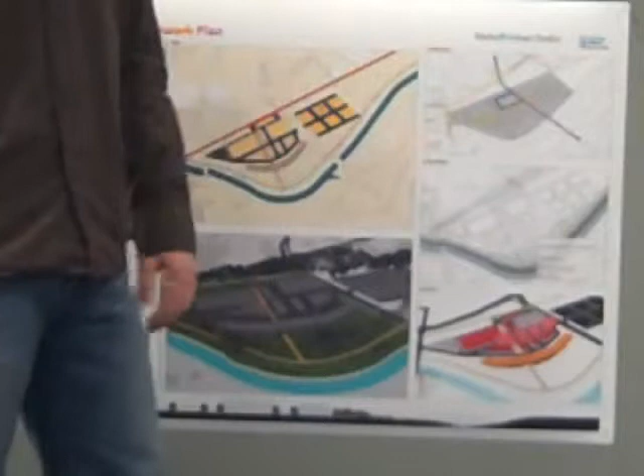We really wanted to emphasize the major connections with the rail line, connections to St. Bernard and Northside on Spring Grove, as well as the close proximity to I-75. We felt that all those transit connections would help bring a good amount of people into the area.

The land use, like we said, is first floor retail and commercial. Second and third floors would be office, and then this area would be the residential units.

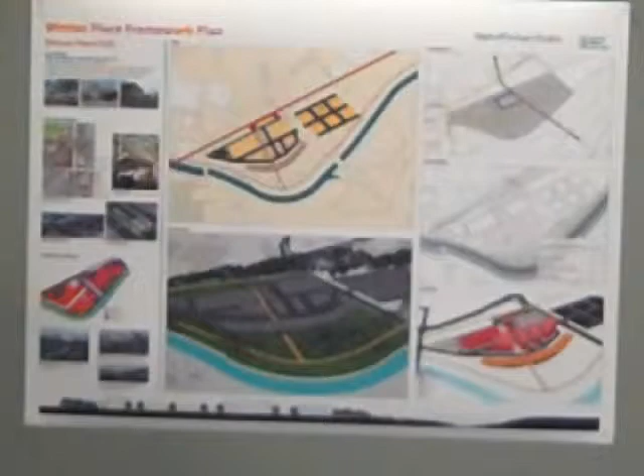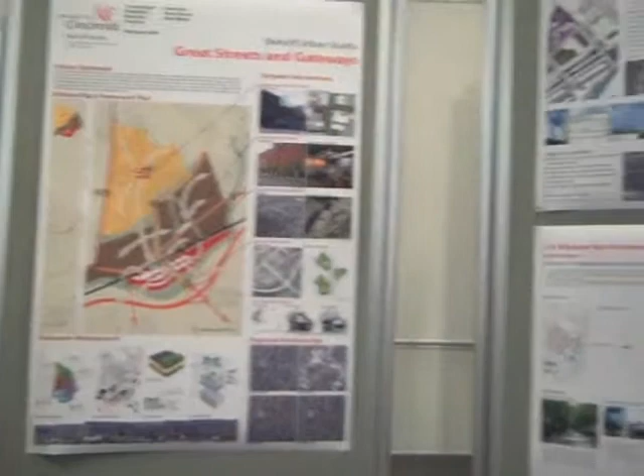When we were talking about creating a green industrial park in this area, we realized that to a certain extent we need an anchoring institution to both give identity to the area and give it a sense of community and cohesiveness, because at present it's a bunch of businesses operating independently of each other. In order for this to really function as a green industrial park, to stimulate the synergies that might happen there, it needs a face. So the project I was proposing was an industrial business incubator on one of the sites in the neighborhood.

This is a large storage facility that's already there, so this would be an adaptive reuse project. You can see in the concept diagram that this building, since it sticks out of everything, becomes the face for the entire area, as well as serving an incubator function which will help young green industries come into the area, get started up safely, and then benefit the industrial district through their business.

From an urban design standpoint, the incubator becomes the focal center for this entire belt of industry, which is shown here in the framework plan. The streets are reoriented—these are actually existing streets that are extended all the way through to the Mill Creek. Then the streetscaping is redone to emphasize the runoff mitigation strategies we've been talking about.

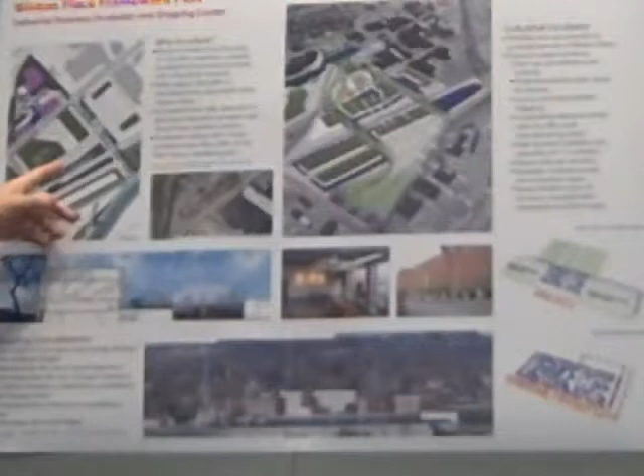Using curbless paving, filling in non-spaces with constructed wetlands, and advocating use of vegetative roofs wherever possible. The hope is that this would give the entire industrial community something to circulate around. It doubles in function as not only an incubator but a shipping distribution center, so young businesses can bring in their products, consolidate shipments, and then ship them out.

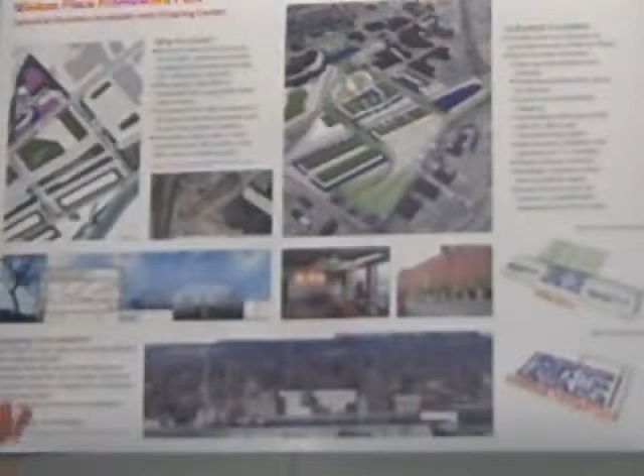So programmatically and formally, it's designed to act as the center of the industrial community, so that this Winton Place area can have some identity.

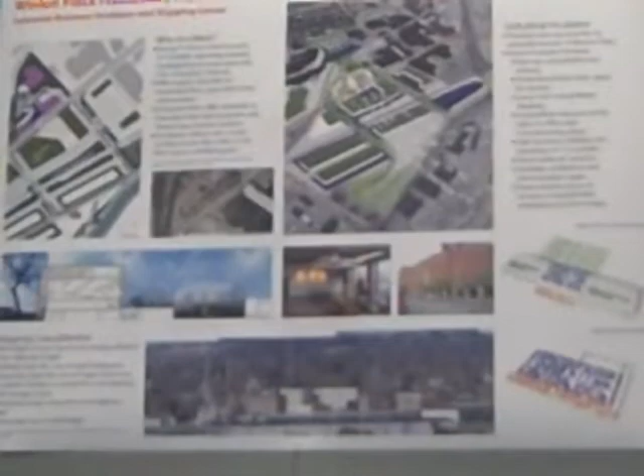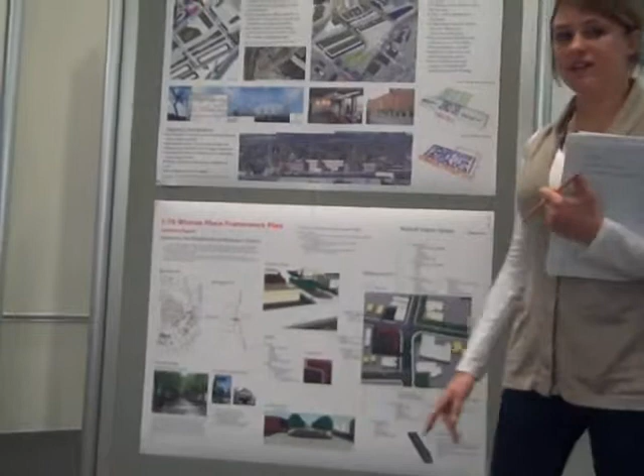Apart from all the industrial development, there is the neighborhood business district. Because there's such a barrier between the residential area and the industrial district, the neighborhood business district is focused primarily on serving the residents of Spring Grove Village.

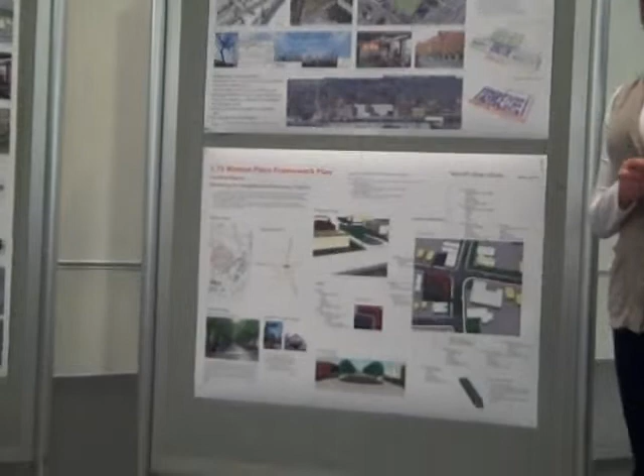Some goals of revitalizing the neighborhood business district are to resist competing uses with the new commercial development. Small-scale development is a main goal. There are no thoroughfares through the area, so you want to focus on uses that will just serve the community.

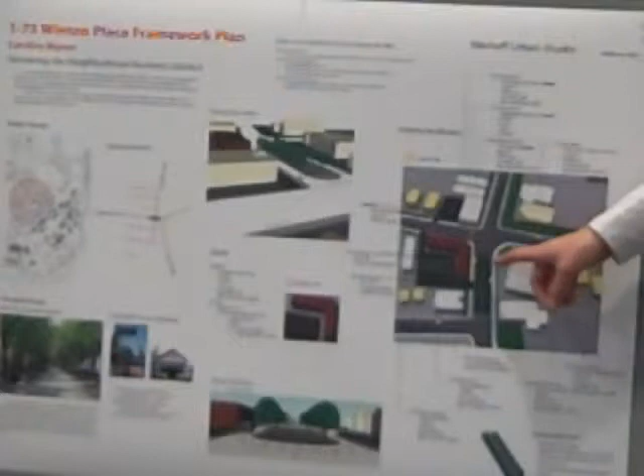Another goal is to create a community center. That's the idea here. So the design for this community center could serve as a farmer's market.

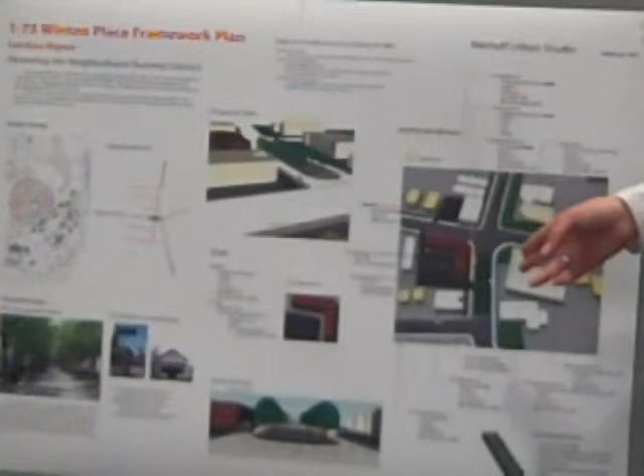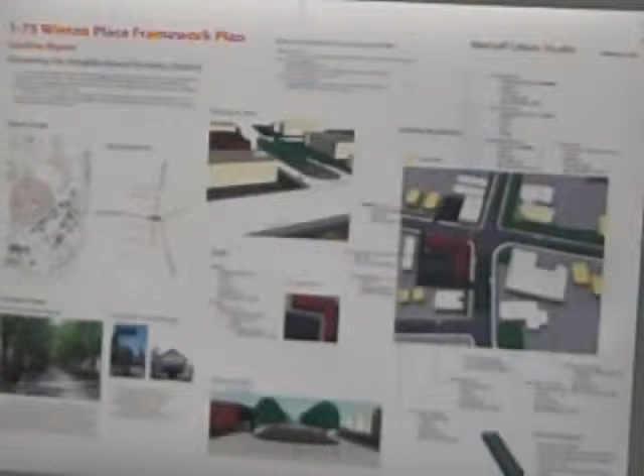The plan is to widen the street, have one-way streets going on either side, and no parking on the street, so it's very pedestrian-oriented. The design looks just like a green median, but it's supposed to model something after Piatt Park, with heavy landscaping so that people in the square don't feel danger from the cars passing through.

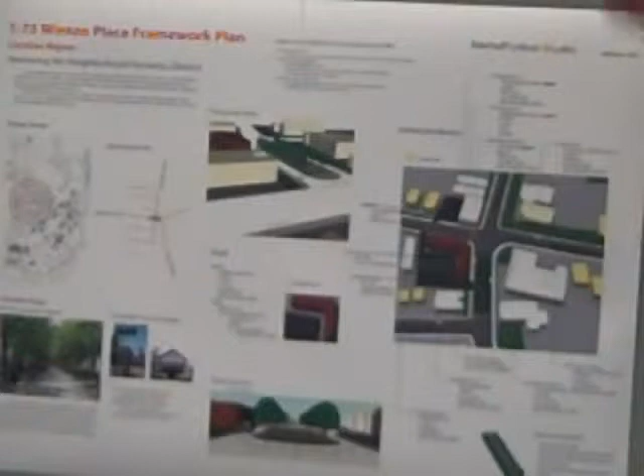Another goal is to focus on the opposing street grids of the neighborhood. This diagram demonstrates how the street grids don't line up. The community square is right in the middle, and widening the street makes it more visible for the buildings in that area.

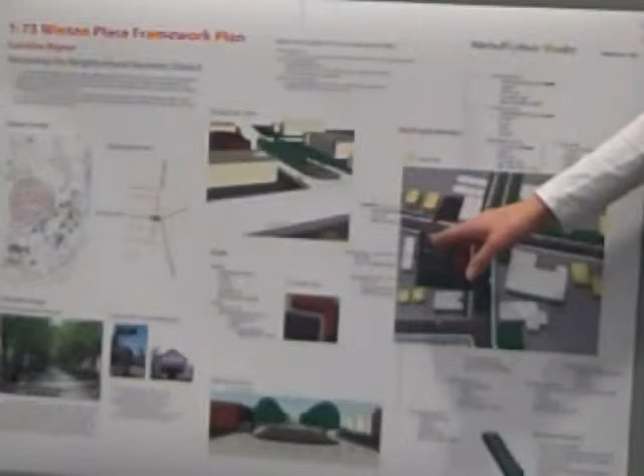And then reconfiguring this block of Mitchell and Edgewood. There was a building oriented in this direction, so adding another building going this way, and then there's parking behind it and additional parking here.

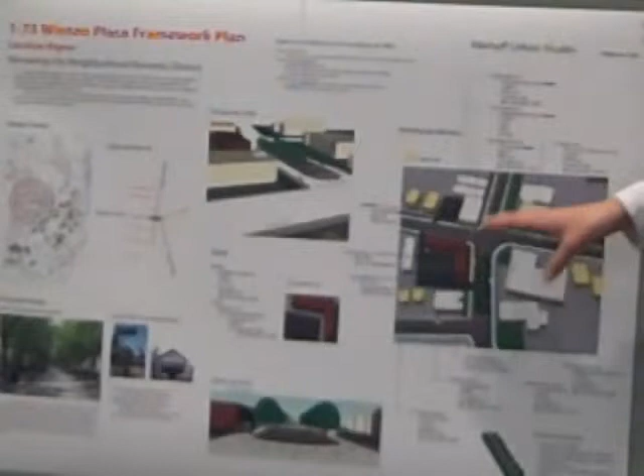Current businesses in the neighborhood business district include the Harmony Lodge here, the community development office, a church, and a barber shop, and then the rest is mostly vacant. The yellow buildings show single-family houses around it, but the focus is mainly on this square as the center of the neighborhood business district, with businesses around that.

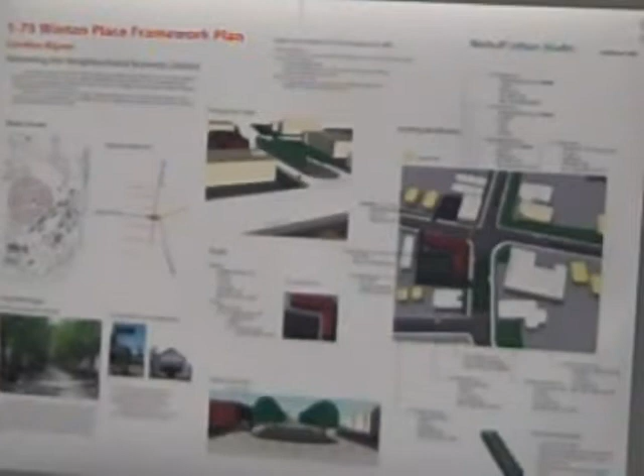Can you talk a little bit about the things on the right side of your board? Sure, I can talk about it.

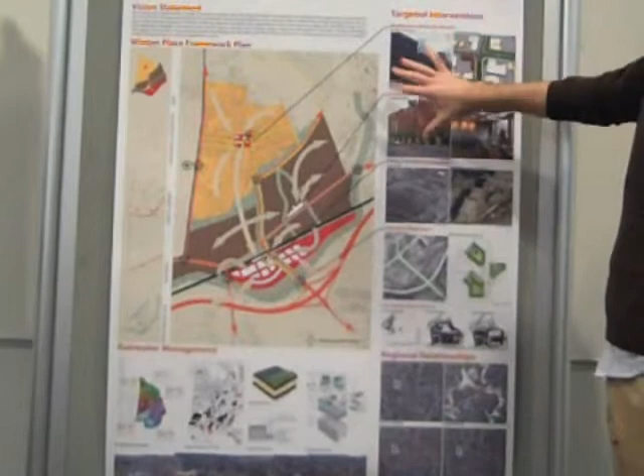These are mainly outlining the interventions that most of us are talking about here, with the 4 major interventions that we're putting in. You can see the location within the framework.

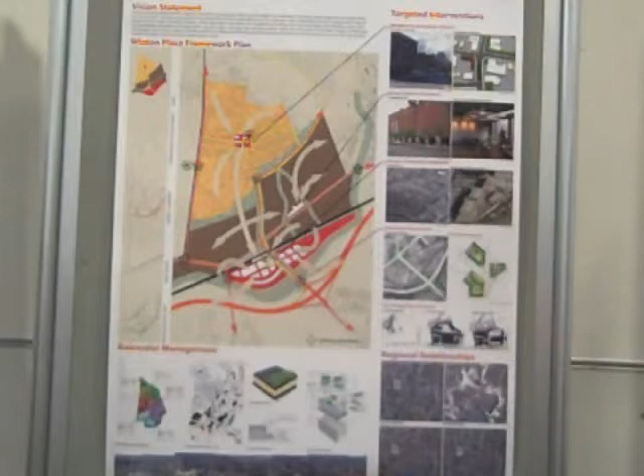Down here we have the regional relationships that we started to look at. You can see where Winton Place is within greater Cincinnati, and we're just trying to get at where it would be within a light rail system. This is kind of the industrial network within Cincinnati, and it's placed within there.

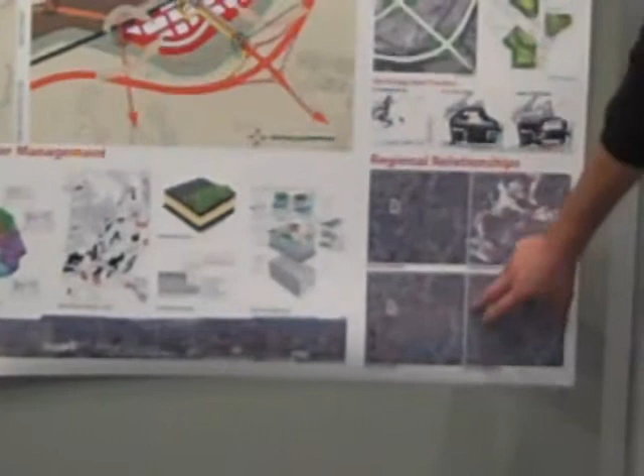This diagram shows the relative lack of business districts in this entire area, whereas they mostly hug along the I-71 corridor. So that's kind of our rationale for trying to create a little bit more development along I-75.

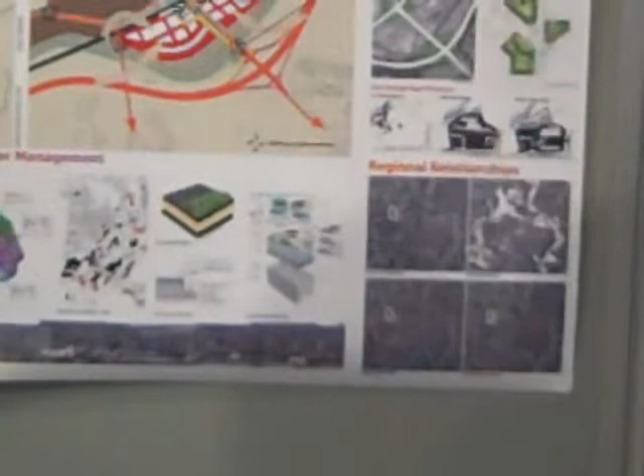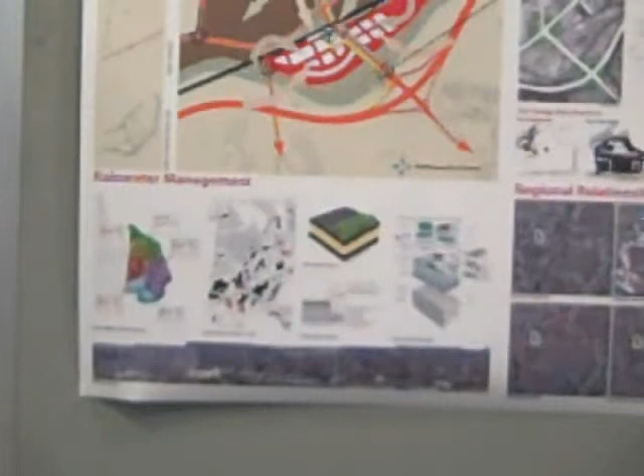And finally, just the general location along rail and highway lines. You can also see a panorama of the site just to give you an idea of the aesthetics we're looking at, as far as industrial buildings and power lines.

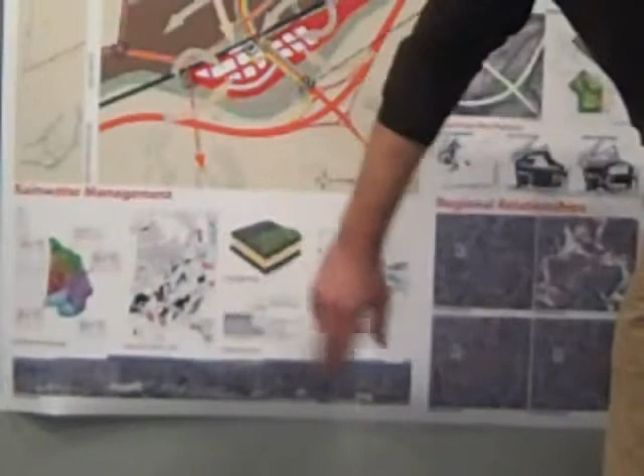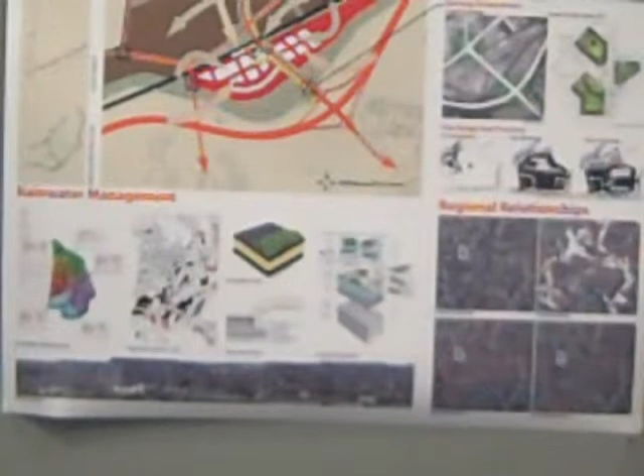And these are some of our runoff management strategies. This is an impervious surfaces and CSO map, so you can see the intensity of rainwater problems that exist right along Mill Creek, and that's why we're trying to create these strategies to mitigate that.

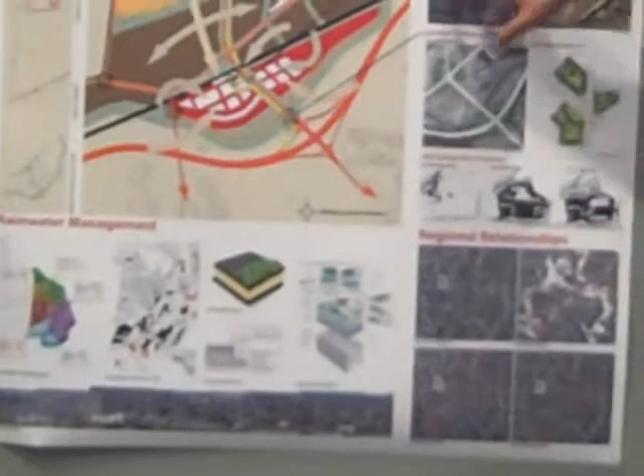You can also see some of the existing conditions along here. I sort of like this picture because it gives you an idea of what the TOD area looks like originally, with just parking lots and very large buildings.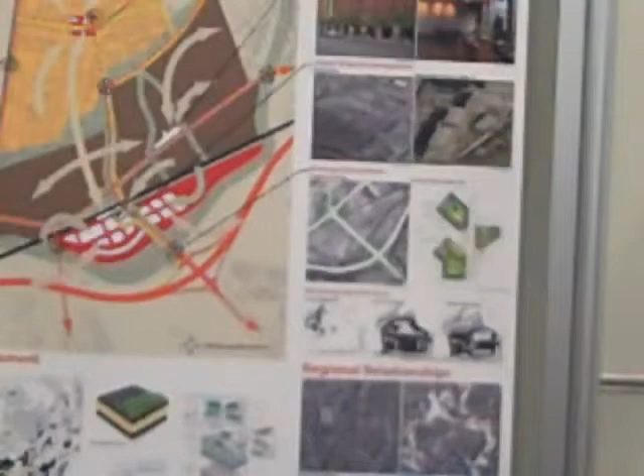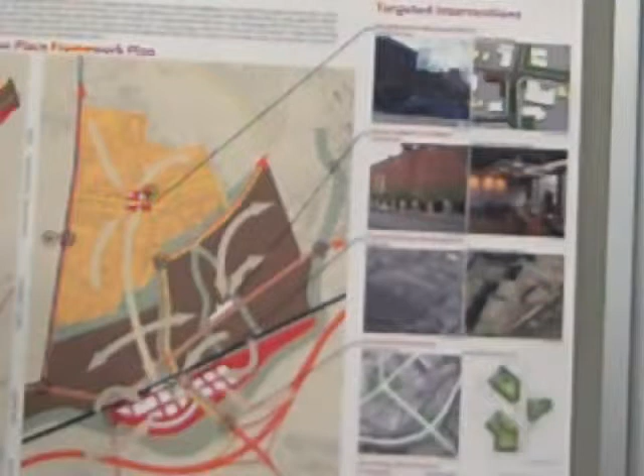And some precedents you have there. Yes, these 2 precedents are for the incubator. This is the Santa Fe area incubator, which is a pretty successful one. It's a good example of what an incubator offers to businesses coming into this area, which is a professional space where they can have all their office services concentrated and they don't have to pay for that space.

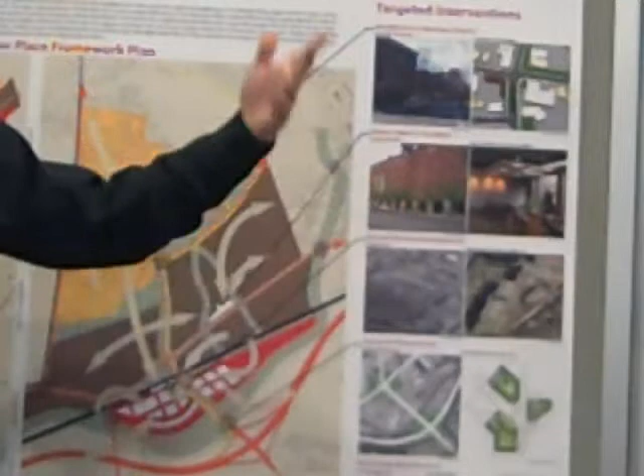And then a related precedent within Cincinnati is Longworth Hall, which is a very similar building to the one I would be working with, and shows some of the programmatic characteristics that could happen at the new industrial incubator.

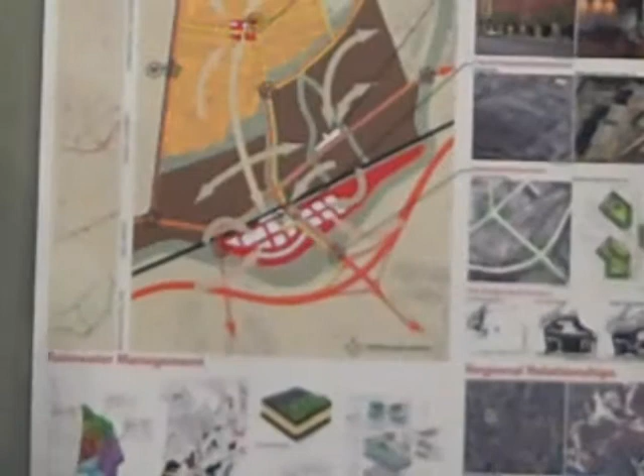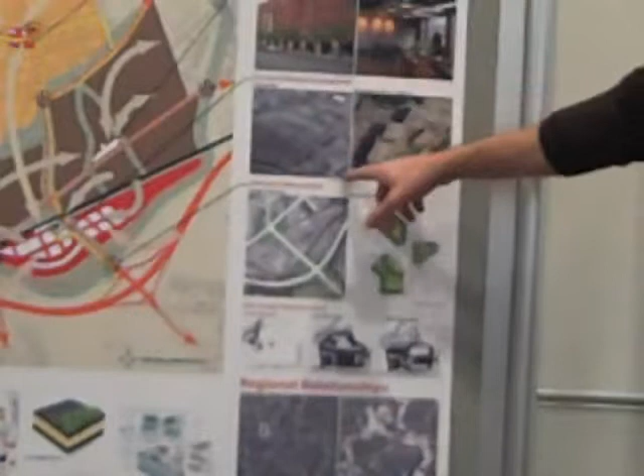And this precedent here is Mockingbird Station in Dallas, Texas, part of the DART light rail system. I chose it as a precedent because it's a very similar site condition, with an interstate highway running perpendicular and a rail line cutting through it. You see the intense urbanization going on there, with structured parking and more high-rise buildings that we're trying to translate to our site if we can. It's a very similar situation, really.

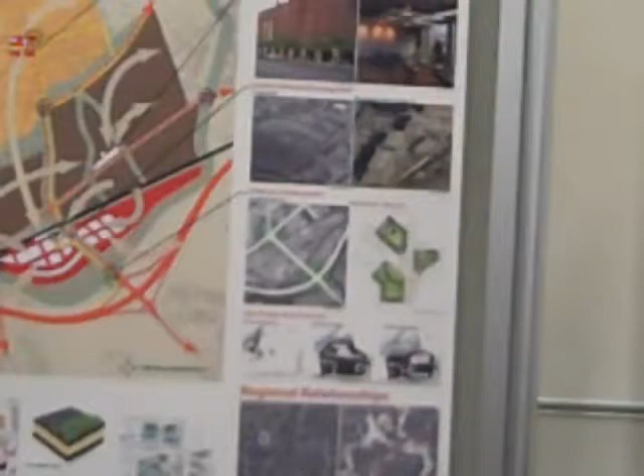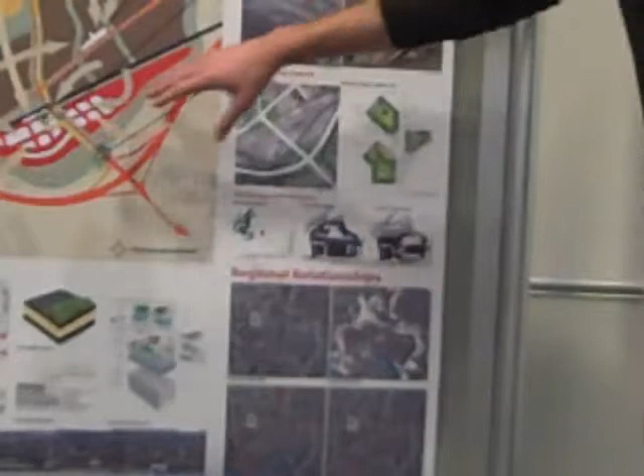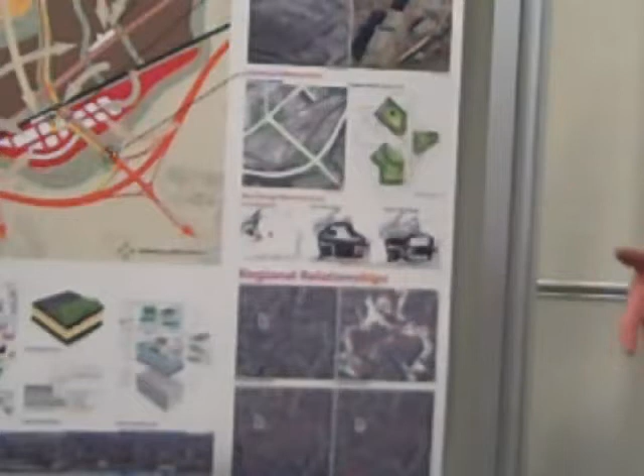Oh, and this diagram here was actually taken from a book, but it was a really good starting point for our ideas of what to do down here. It's best site design practices, showing how the typical grocery store strip can be adapted to be more conducive to better site design. So I thought that was kind of a springboard for some of our strategies here.

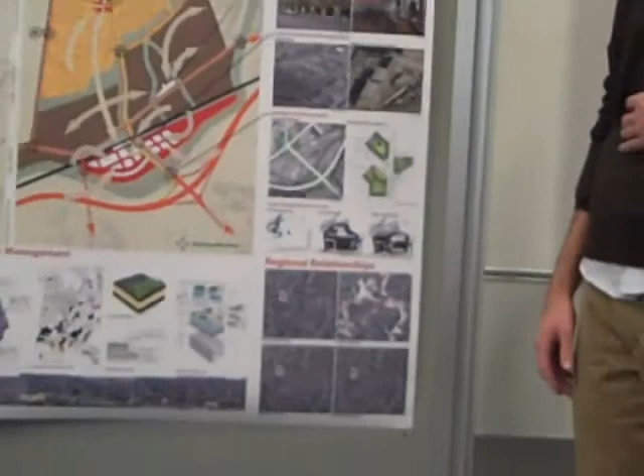Very nice presentation. Very nice, yes, presentation, yes, nice.